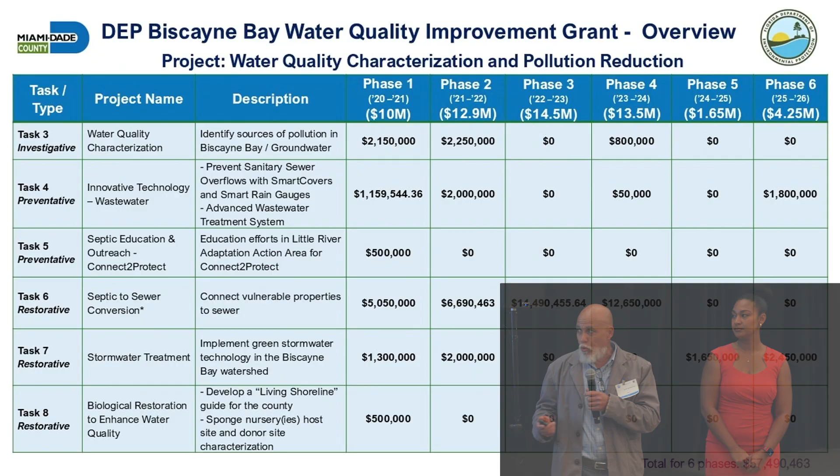But we've seen some challenges recently. Pollutants, we've had chronic problems over time, but we've had a couple of seagrass die-offs in recent years. We've seen fish kills and ongoing problems over time. So we received a grant from the FDEP to characterize water quality, especially in the canals, and try to find sources and basically characterize the water quality.

Our partners include Dr. Gardinali, Dr. Josefina Olascoaga, Peter Swart, Drs. Gidley and Solo-Gabriele, who have graced us with their presence today. So we're collaborating with local experts for this characterization. So the main point is primarily to identify and quantify the sources of pollution and also determine where they go.

And we'll look at things like nutrients, heavy metals, bacterial source tracking, stable isotopes, and also trace chemicals, things like PFAS and microplastics. I don't think you all are scientists, so in terms of stable isotopes, that's simply elements have different forms, so nitrogen, carbon have different isotopes, and the ratio of one isotope to the other can tell you things like where on the food web, the food chain you are.

So the higher on, as you didn't know, we're the highest on the food chain. So if we see certain ratios, it's more information that says it's associated with us. Okay. Also, we're trying to develop a 3D circulation model. So part of the intent is not only to determine the quantity and the source, but where it ends up.

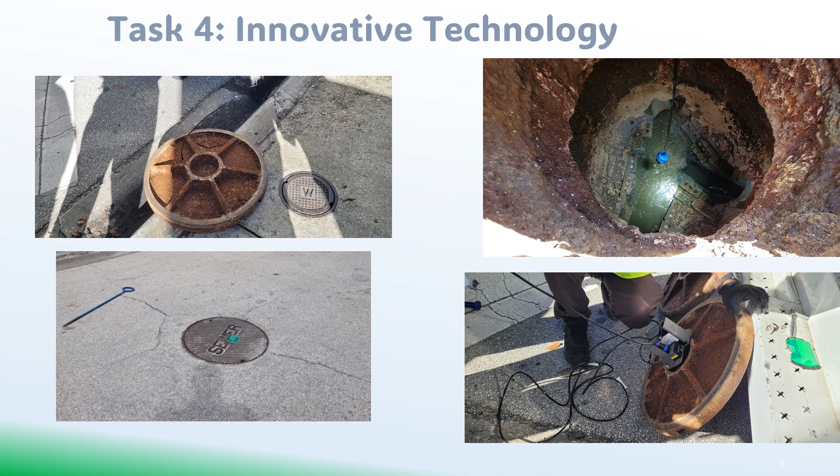All right. So one of the tasks of the grant, let me go back. So the grant is broken up into these tasks. Task 1 and 2 had to do with developing a QAPP and some administrative things. Here we're going to focus on 3 through 8. And I already spoke about number 3, so we'll proceed to number 4. Number 4 is part of our technologies.

It's smart covers. So these smart covers can be installed in wastewater or stormwater manholes, and they detect differences in the water levels. So if the water level downstream is vastly different from the one upstream, it can tell you there's something wrong in the system. It sends a signal to our utilities to let them know, hey, there's a problem, go out quickly and respond to it before you get a major discharge, a sanitary sewer overflow.

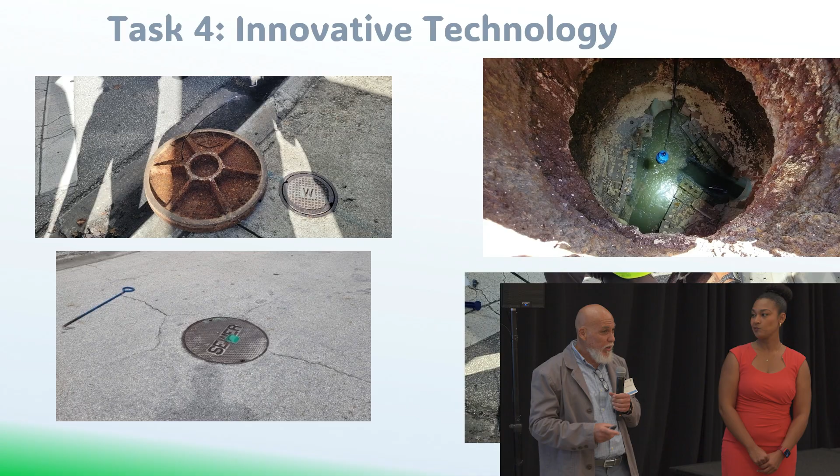And that, by the way, is part of Gallo's job. Thank you, Gallo.

So between 2 phases, 426 smart covers have been installed throughout the county. These units, as I mentioned, provide real-time information on the differential water levels and help to prevent sanitary sewer overflows. So our division, RER DERM, is now the 5th largest entity in the nation using smart cover technology.

Thank you. I won't take any credit for it.

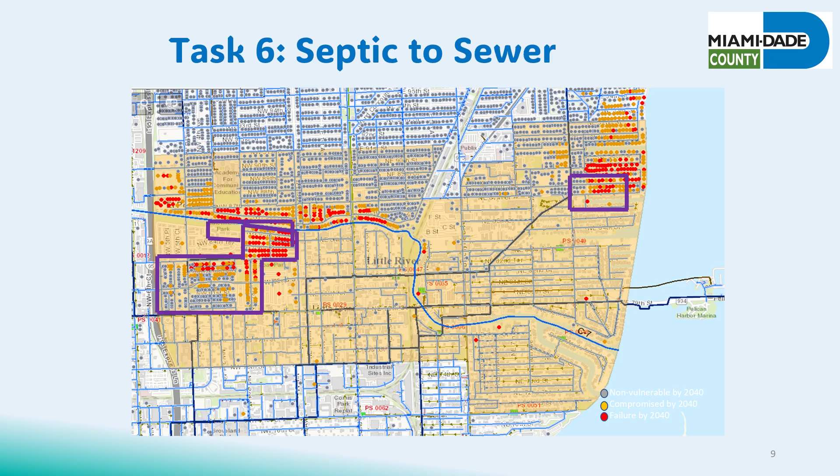No. Okay. Task 5 is education and outreach, and this is primarily employed in the Little River Adaptation Action Area. So if you're unfamiliar, the Little River C7 feeds into the Julia Tuttle Basin. A lot of septic tanks in there, a lot of other issues in the basin. Chronic flooding because they are areas of low elevation. You have the combination of high water table, low elevation with a septic tank. Not a good situation. Okay, so task 6 is septic to sewer conversion. And here are the primary areas where we're focusing on that effort.

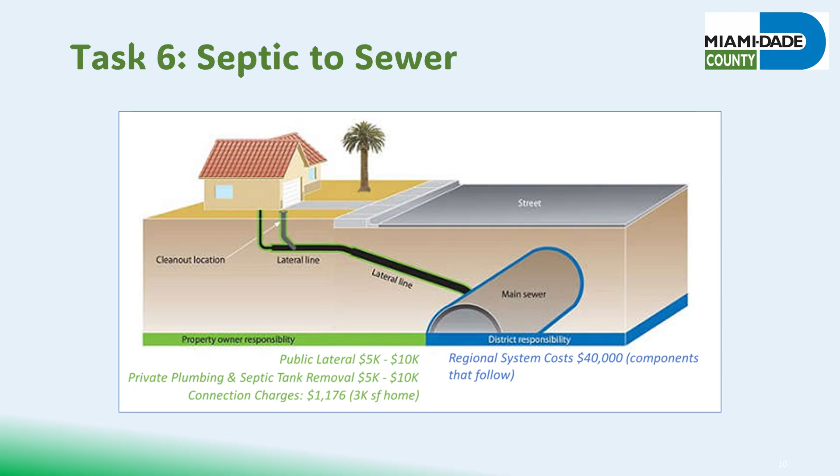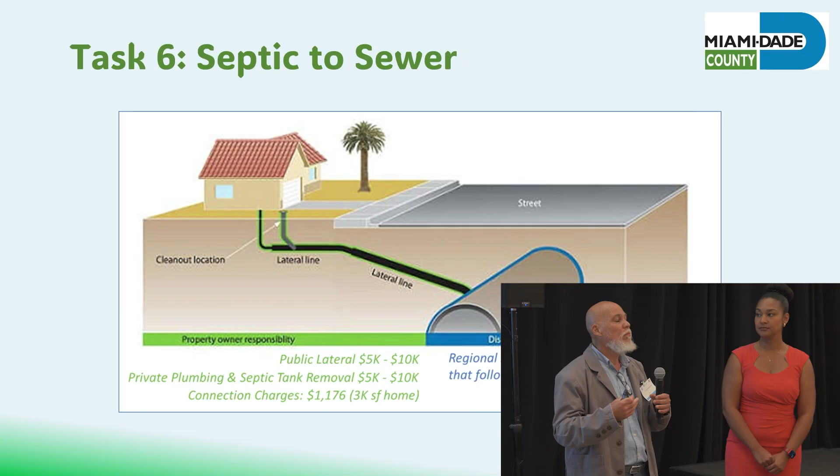And basically, in the areas with septic tanks, you put in the utility lines, the sanitary sewer line, and then you get the residents to abandon their septic tank and connect. Unfortunately, that comes at quite a cost to the homeowner, so we're trying to make it easier and less expensive for them to connect to the regional system. It's part of this grant.

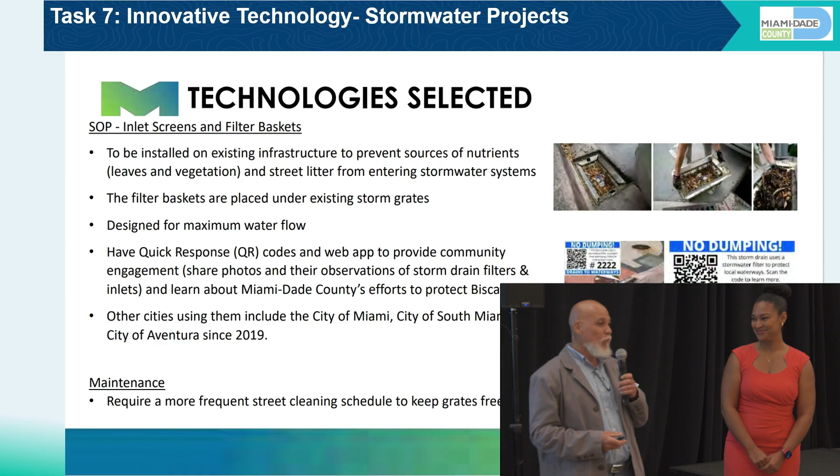And task 7 has to do with innovative stormwater technologies. I'll turn that over to my more knowledgeable colleague, Karina. Thank you, Omar. So I'm the engineer for the Water Resources Division in Miami-Dade County. For task 7, this effort was mainly on some stormwater projects, to incorporate some innovative technologies in strategic locations.

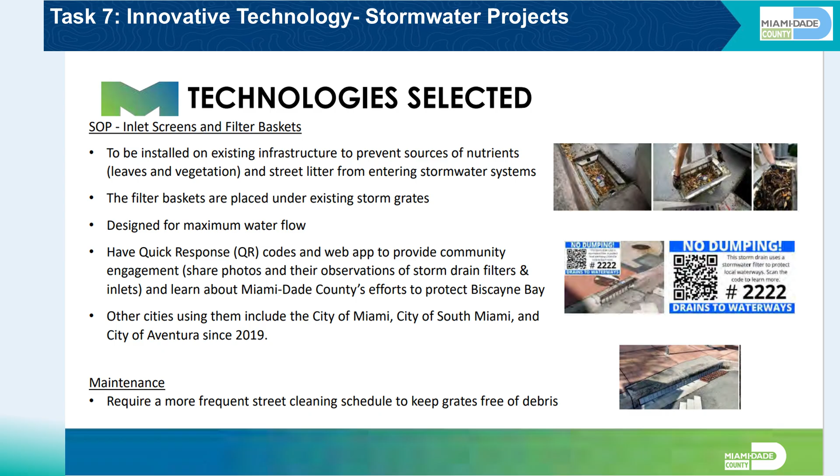One of them is our SOP inlet screen and filter baskets. They mainly catch leaves and vegetation that may enter the stormwater systems. But something unique about this is that it has a QR code and it allows community engagement. The schedules to clean out these baskets may fall behind in certain areas, since they get filled quicker than in others. By having communities respond to that, it allows for the turnaround time to be faster.

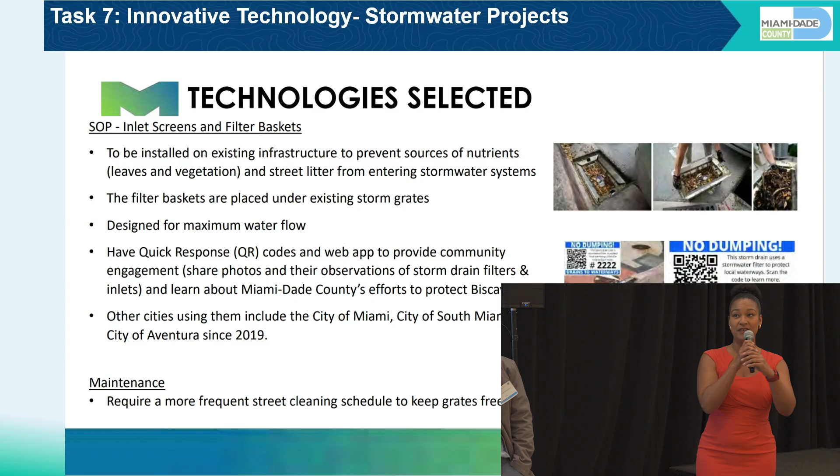Here we have the FABCO storm basin. These are cartridge filtration systems. They have media inside that remove pollutants. And there's a feasibility to it because it's like a cartridge. You twist it, open it up, remove the filtration, and replace. So there's an ease to it. And then the trash itself is removed by a vac truck.

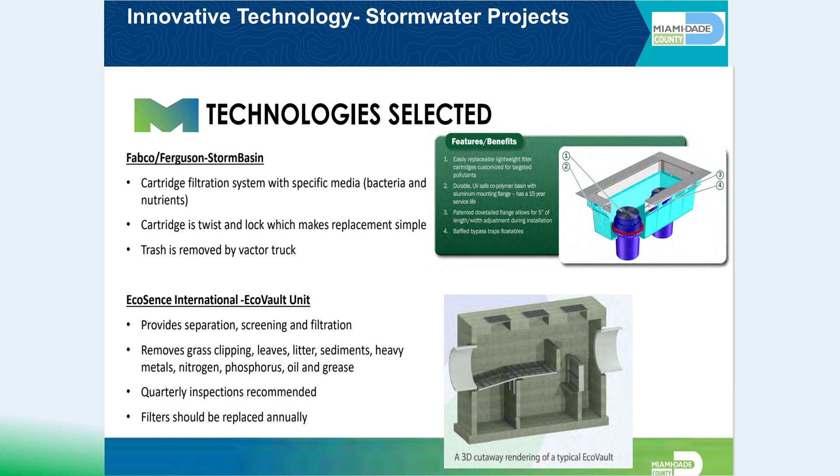And then the EcoVault unit provides separation when the water comes in. It allows the water to slow down its flow, so the debris and sediments are able to settle. Also on the top, it has a screen that picks up the leaves and debris, and it doesn't interact with the water. So you don't have all of the vegetation just sitting in water and creating more pollution.

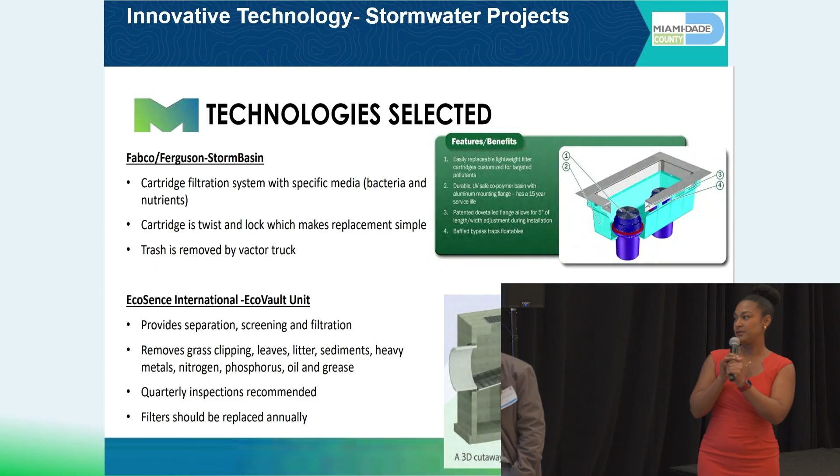By the way, for many of these technologies, there's a very key component in that they have to be maintained. Technologies are great, but you have to maintain them or they're not going to work to capacity, like our car, exactly.

So here we have a jellyfish. Something great about this technology is that it also uses filtration media to remove different types of pollutants, but it has a very sleek profile, so you don't need a lot of area to incorporate it. It also has a high flow bypass. The filters are reusable, so that's another perk. You're able to clean them out and reuse them, and the replacement time on the filters is longer, 2 to 5 years.

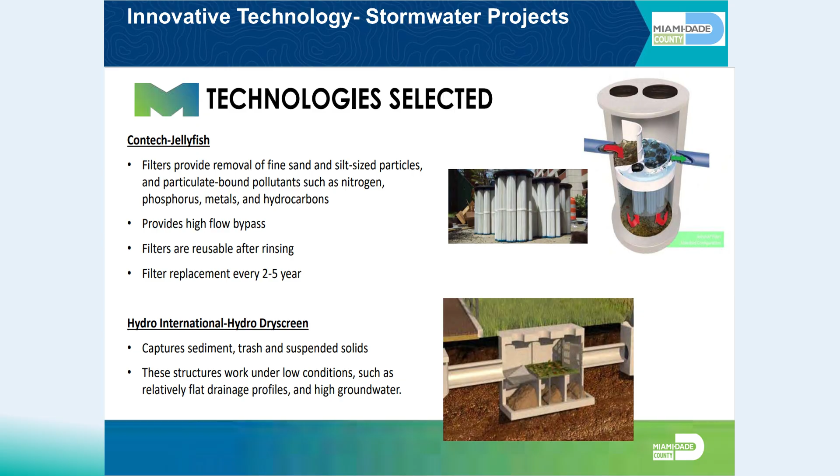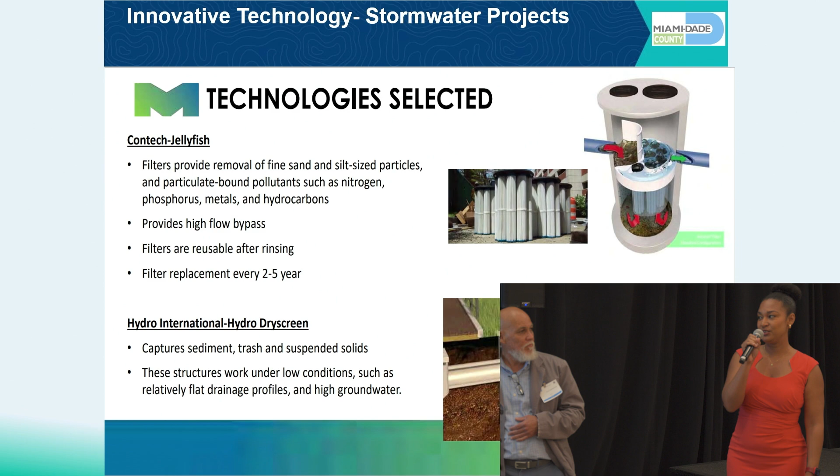And the Hydro Dryscreens also capture sediments, trash and solids, and these work under low conditions, so they don't need a lot of profile, so they can work in areas of high groundwater as well as flat drainage profiles. Thank you. Thank you, Karina.